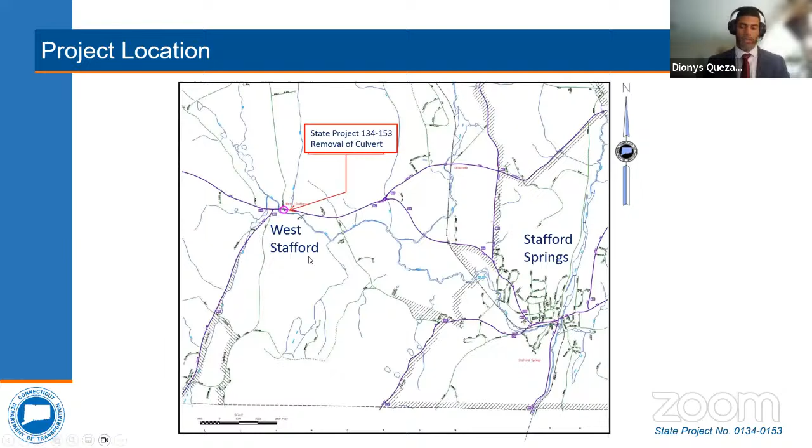The culvert, highlighted in blue, goes from the property at the corner of Hampden Road and West Stafford Road. From that building, it goes down southeast, close to another property, as you can see in the lawn. We will talk more about the culvert itself, and you can see that it's located right in front of the Carquest Auto Parts in West Stafford.

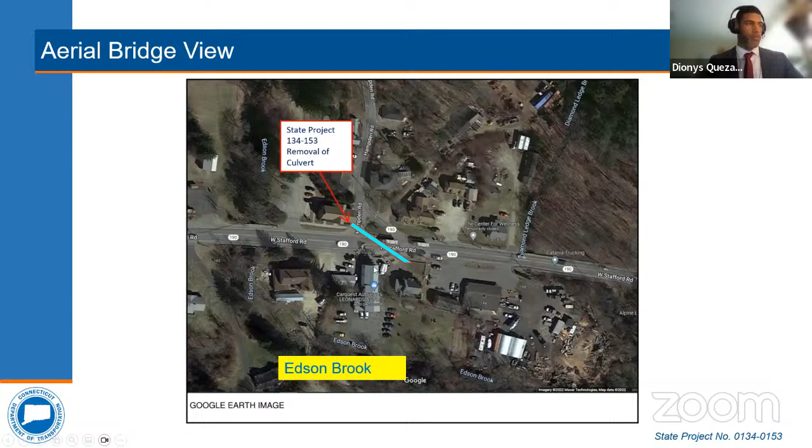To go more into the project itself, we want to give you the reasons for it. The purpose of this project is to remove the stone arch, which will avoid potential roadway undermining. We're trying to avoid future problems, future inspection, and future maintenance.

In order to do this, there are a couple of needs: to maintain reasonable travel during construction, maintain access to adjacent properties, create a safe and passable roadway at the completion of construction, and maintain utility service during construction.

In order to do all this, we also have some goals: to remove all culvert elements, which is our primary purpose, to create a consistent roadway structure through the site, minimize travel interruptions on Route 190 and Hampden Road during construction, avoid utility impacts as mentioned in the needs, and mitigate groundwater effects on the two adjacent properties on the southeast and northwest corners.

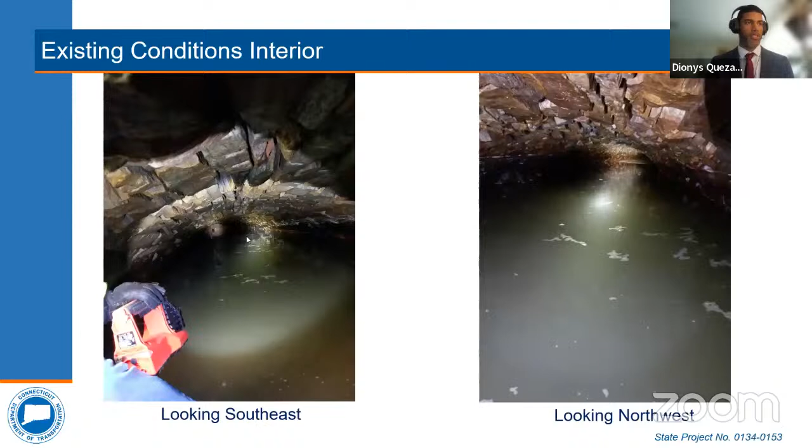As we started looking, the way we were able to find that the culvert was there was when the CT Water Company was installing their water main in Route 190 back in 2022. They punctured through this culvert. When they did, Connecticut DOT needed to inspect it to see what was there. They made an opening, and as you can see, that's what the image showed—the opening as they went in and found out that this culvert was actually there.

After the culvert was found, the water main went over it with insulation for frost protection. Once that was done, riprap was placed to act as a concrete form. After the riprap was up to a high elevation, they poured the concrete form and patched the culvert back into place, and it's still structurally sound.

The two properties located are the southeast property, where the bulkhead is, and the northwest property, where the old mill used to be. Here is the Carquest Auto Parts—as you can see, the curve is right in front of it. Something I also want to point out in this picture is that there are utility poles located really close by, which we'll talk more about in the project disturbance areas during construction.

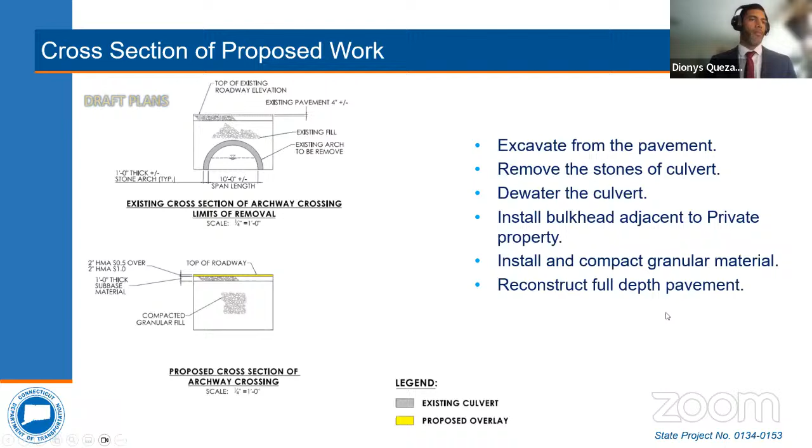They'll remove everything that's inside of the culvert itself, and then start installing and compacting granular material. Once that's all compact and the granular material is inside the culvert, the culvert is removed. It's just regular granular material and compacted. They start building it up and reconstruct the full depth of pavement and bring it back to what it's like out there right now.

More on how the work is done. As of right now, we are recommending two stages. Stage one is placing barriers on the south side of Route 190, on the eastbound side.

Stage one will be construction on that private property, removing the culvert there. The driveway will be impacted. Once that work is all said and done, excavating and removing the stone culvert, the contractor will backfill, place topsoil, reestablish turf, and pave the driveway that were disturbed as well. That is all outside of the existing traffic area. Route 190 will have traffic going, no problems, no disturbance to ongoing traffic.

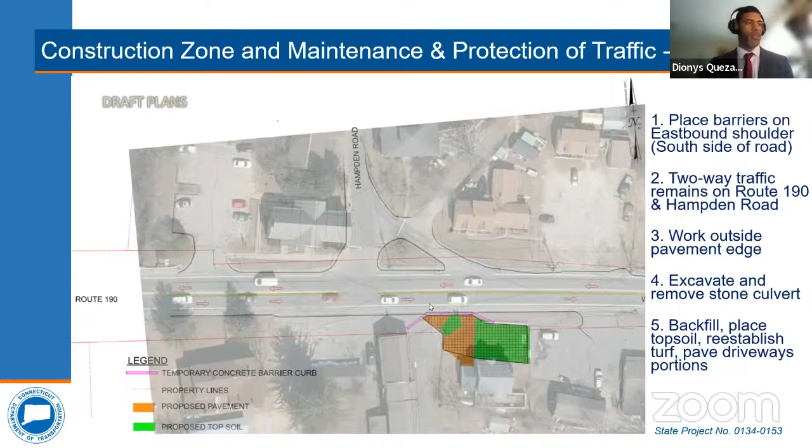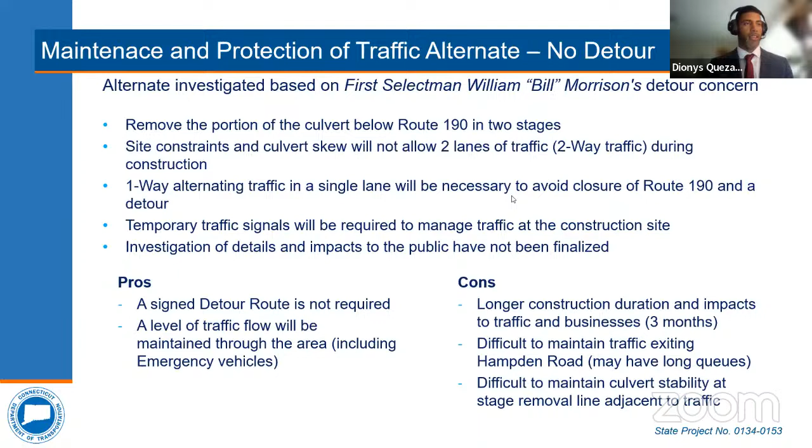So they will have long queues, and it has difficulty in maintaining culvert stability at stage because of the skew of the angle and the adjacent traffic traveling close to the excavating limits of the culvert itself.

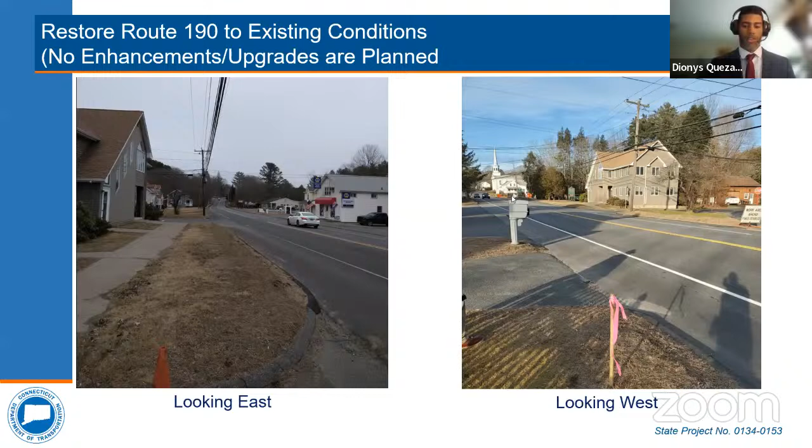At the end of the day, once the project is set and complete, there will be no enhancement, no upgrade. Everything will look the same as it does today. New project pavement will be at the limits of excavation and squared up with what's existing. Looking east and looking west, it will be very similar to that.

We looked at further items, environmental impacts. There are no environmental or permanent impacts to environmental regulated areas. Due to the Crystal Lake Brook 100-year flood zone, Connecticut DOT submitted a flood management general permit plan because we're working so close to this area.

There are private property impacts, as we are aware. We will try to keep vehicle access to adjacent property. Everything will be modified as practical as possible during construction to maintain the level of access.

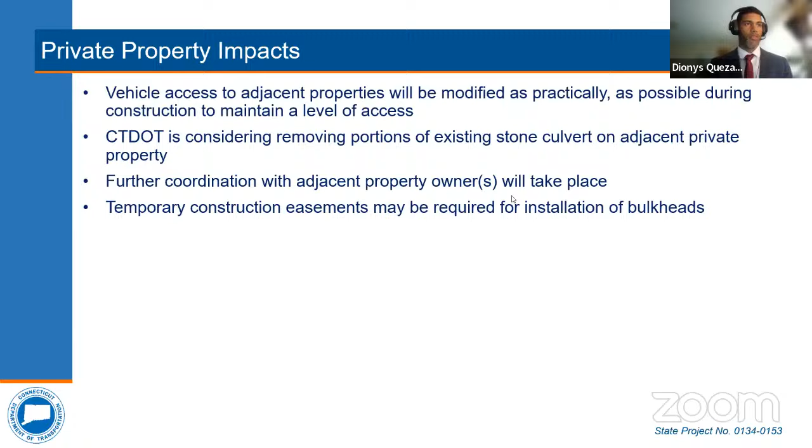Connecticut DOT is considering removing a portion of the existing stone culvert on adjacent private property, on that grass area on the southeast corner. Further coordination with adjacent property owners will take place, and a temporary construction easement may be required for installation of bulkheads on the right-of-ways if needed.

It is our office's responsibility to acquire the property rights needed for transportation projects. As Dionys mentioned, the proposed project may require acquisition of some temporary construction easements from properties in the immediate vicinity of the culvert. I'm here tonight to elaborate on that and give a brief overview of the department's acquisition process.

When we talk about temporary construction easements, we're referring to a type of property right that the department acquires when it needs to use private property to build the project, but the current owner would still own the underlying land, and the easement gets released once the project is completed.

Any necessary construction easements or other property rights required for the project will be acquired in accordance with Connecticut General Statutes sections 13A-73 and 13A-98E. Whenever there is federal money used in any phase of a project, the department must adhere to the Uniform Relocation Assistance and Real Property Acquisition Policies Act of 1970.

Let me go to the next slide, please. Once we're further into design and know exactly the limits of any easements or other property rights required, and we're ready to begin the acquisition process, each impacted property owner will receive a letter of intent to acquire from our office, along with a property map depicting the exact rights to be acquired.

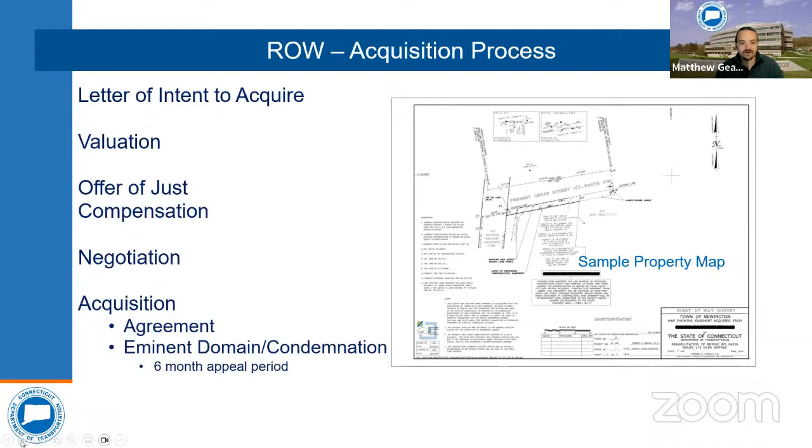So I'll be here doing the Q&A to answer any questions, but in the meantime, I'm going to pass it back over to Dionys to finish with the presentation.

So finalizing the project itself, the anticipated construction cost is around $700,000. It is 100% state funded, no cost to the town.

The anticipated project schedule, as of now, design completion is anticipated for October 2024, with a start of construction in spring 2025, approximately 1.5 months based on construction staging that includes a 3-day roadway closure during which traffic would be detoured. If not, 3 months if it's alternating one-way traffic.

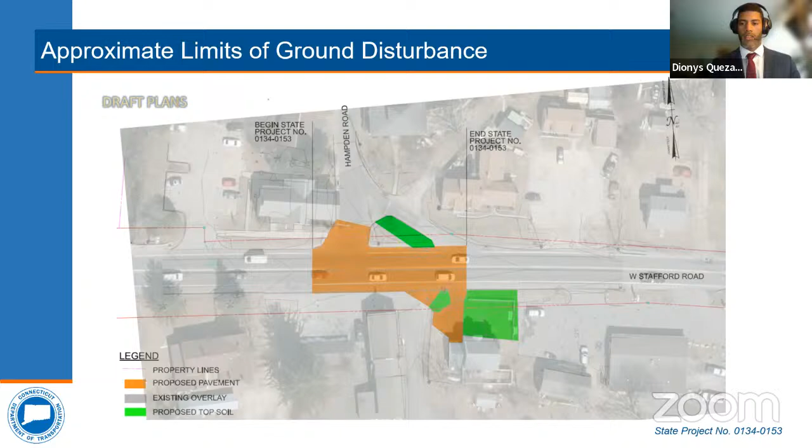Don, can you speak about Diamond Ledge Road and diversion of traffic there? Hello, this is Don Worst from CHA. Samuel, can you clarify your comment about Diamond Ledge Road? Are you saying traffic on Diamond Ledge Road will need to be detoured as part of this, or that Diamond Ledge Road is another option for traffic during a detour period? Our understanding is Diamond Ledge Road is to the north, and we are not planning to sign any detours along that road or prevent traffic from using it. We can move on to other questions while Samuel clarifies if I haven't answered his question properly.

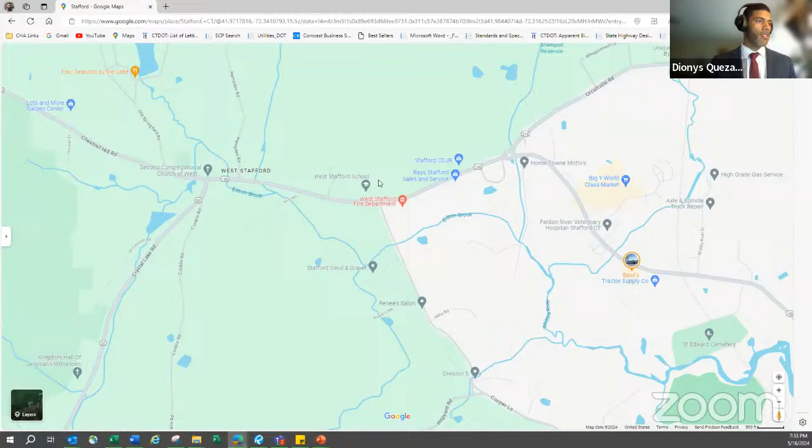And will someone be able to walk from Route 30 to Kroll Road? So I know Route 30 is to the west of Route 190. I don't know where Kroll Road is exactly. Okay, I see it now. Yes, with pedestrian access implemented during construction, we should be able to mitigate pedestrians.

Pedestrian access will be along the south side of 190. We can't maintain it on the north side because the culvert actually touches the building at the northwest corner. Now, yep, so that's good.

Samuel has a question - if looking to go westerly along 190, you need to detour around the area. Yes, so the idea is if we're going through Route 190 down to the west side, a detour may be necessary to avoid construction. We recommend using state routes, that's Route 140 and Route 30 from Stafford Springs.

Donna has a question. Do you consider working during the night rather than during the daylight hours?

We are still in preliminary design and working out times. If that is something that is okay with the public, it's something we should consider and probably we'll think about adding it to the plan.

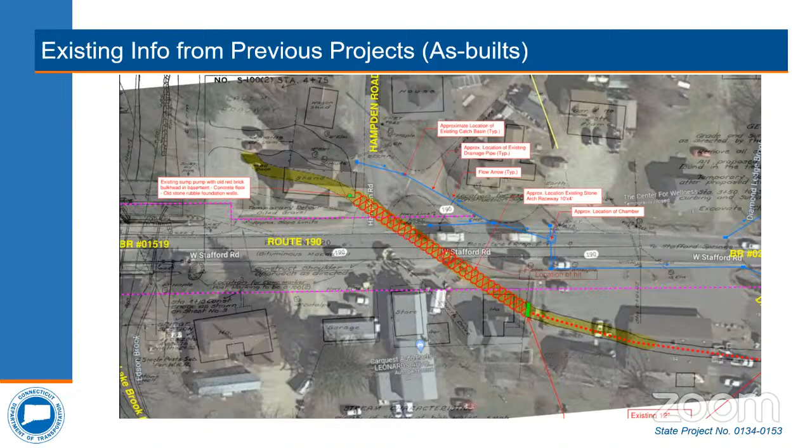Deb mentioned it's from the 30s - in the big flood pictures I saw in the hall in Staffordville near the post office. So it's from the 30s. Thank you.

Staffordville post office.

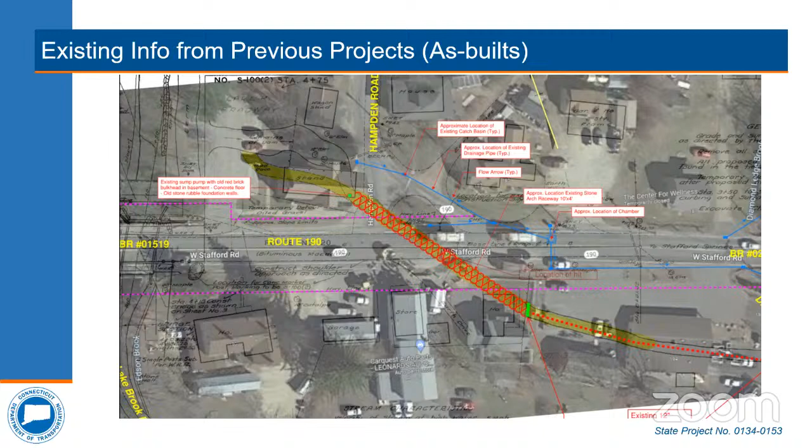Which side are you starting on, the factory or the house side? That's Deb's question. Right now we're very early in design. We have been recommending to start from the house side as stage 1 and move ourselves into the northwest corner - so from the house side to the factory.

Any other questions at this time? Thanks, good luck. Glad you are starting on the house auto parts side. Sounds good.